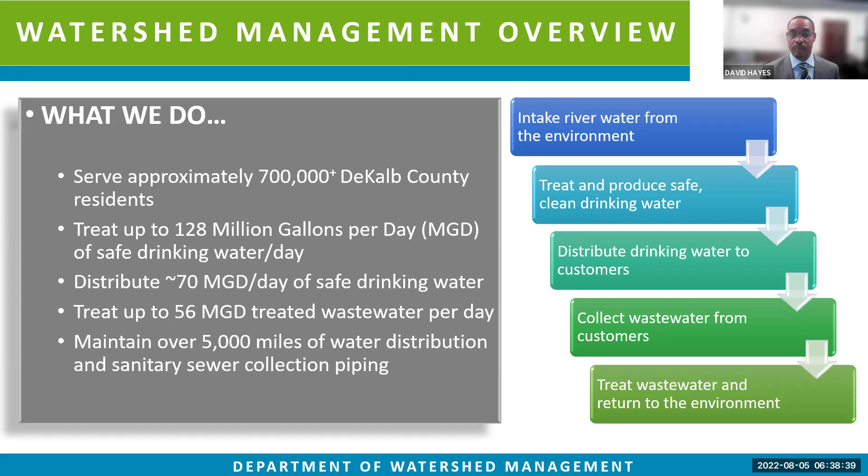So why are we replacing the lines in this area? Some of the water lines are more than 60 years of age and have far outlived their life. In your subdivision, it is unfortunate they used a PVC line that has a shorter lifespan. Your lines were installed somewhere around the 1984, 86 era. But these lines get brittle and they break. So what we're trying to do now is replace the water lines, to reduce the breaks, to improve service, which will yield a better DeKalb, a better future.

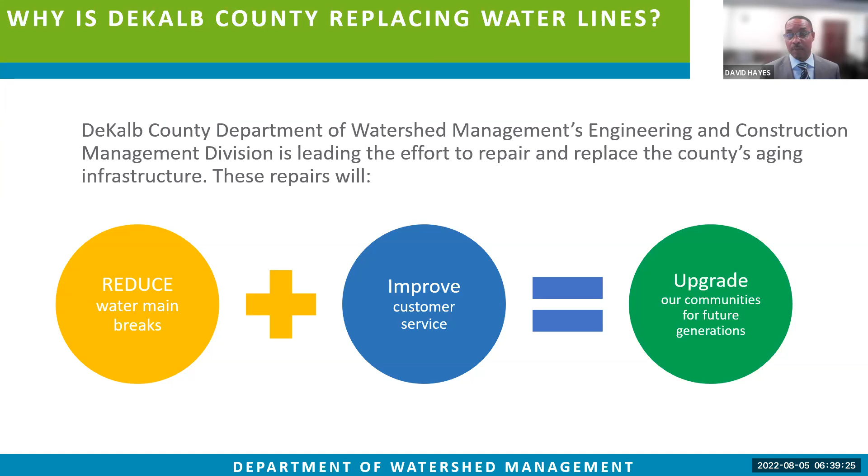To accomplish this, we've dedicated a full team to this project to include every needed resource from Watershed and all other water departments within DeKalb County, and several industry-leading engineering firms and construction firms, all led by DeKalb County's own Watershed Management Engineering Department. With this team, this will allow a timely, safe, and successful project.

Managing this initiative, and the next person that you will hear from, is the program administrator, Ms. Cassandra Marshall. Thank you, Director Hayes. Good evening. My name is Cassandra Marshall.

I am the Program Administrator for Capital Improvement Projects for Watershed Management. I am also responsible for managing the DWM construction management staff. In these next few slides, I will provide an overview of the system problems and our solution to repairing the aging water system.

In the North Shore subdivision area, the county has been faced with 44 water main breaks from 1989 to 2021. We've also encountered 19 complaints about brown water or low water pressure issues from 2017 to 2021. Although this pipe was installed in the 1980s, we've encountered constant breaks and failures, creating multiple operational inefficiencies.

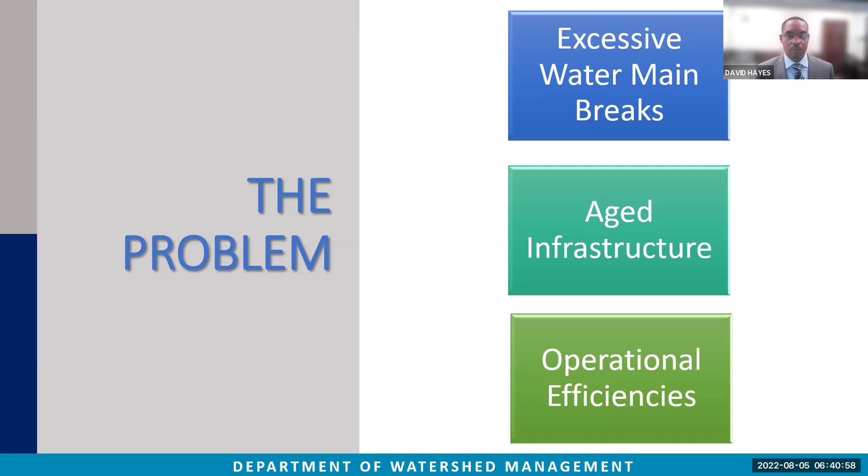The county has over 3,000 miles of pipe in the water system to maintain and provide drinking water to the ratepayers. We also have 4 pressure zones, 21 water storage facilities shown in cyan on the map, 16 pump stations shown in blue on the map, and 6 pressure regulating stations. As you can see, this is a large system to maintain.

Most of the system is aged and cannot be repaired all at one time. Therefore, the county had to develop a best practice way to evaluate and prioritize how and when the piping will be replaced. Our first objective was to model the system.

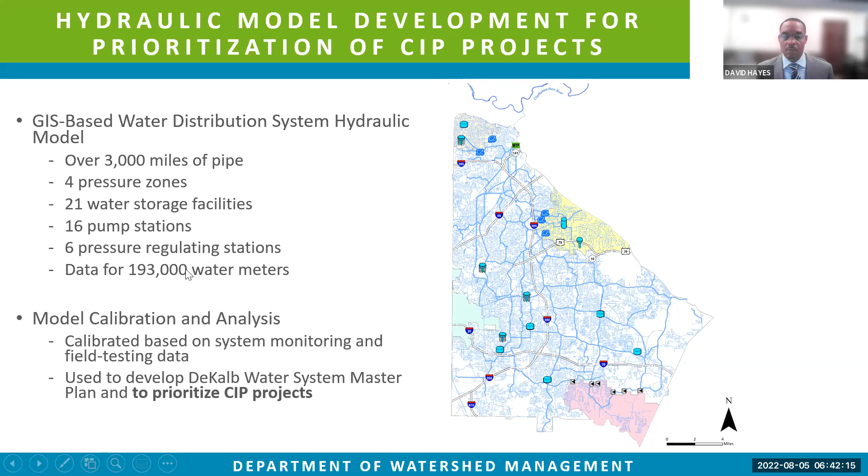In 2019, the county developed its first hydraulic model. A hydraulic model is a computer simulation of the water system. The model provided a big picture look at how the system should be functioning. To develop the model, we used county GIS data, meter data of the water usage from the billing system, and facilities data such as the water storage facilities and regulating stations. This data was ultimately used to develop the county's master plan and used to prioritize projects.

So to this point of the presentation, you've heard about the problem and the development of a replacement plan. I will now speak to the solution and the execution of the CIP project.

So what does CIP stand for? CIP, or Capital Improvement Project, is a project that helps maintain or improve an asset. It can either be new construction, an expansion, renovation, or replacement of an existing infrastructure.

Last year, the Board of Commissioners approved a new CIP program for $2.4 billion for projects to be completed from 2021 to 2030. The North Shore Water Main Replacement Project is a $4.4 million project included within that plan. My team, the CIP team, is responsible for getting that work done.

My team includes 4 DWM construction managers and 12 licensed inspectors. Later in the presentation, you will also hear from the DWM construction project manager for this project, Mr. Edgardo Amezquita, who has over 20 years of construction management experience and is a licensed water professional.

Along with in-house staff, we are also supported by consulting firms who help assist the county with construction management and inspection services. What we want you to know is we're here to help. We want to reduce or eliminate emergency repairs. We want to stop breaks. And finally, after the project is complete, it will improve sustainability to the system. These improvements should last a minimum of 70-plus years.

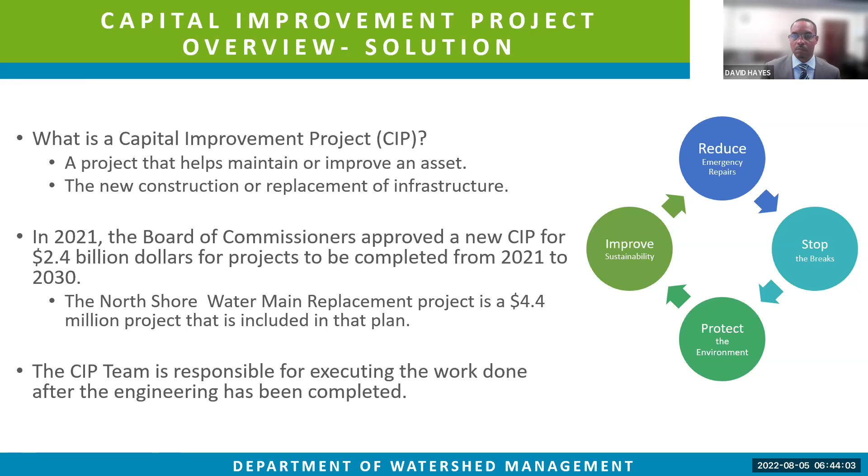Good evening, everyone. As Ms. Marshall said, my name is Edgardo Amezquita. I am assigned as the construction project manager for this project. My team consists of other construction managers and on-site inspectors. What my team does is we work closely with the contractor to make sure we progress through the project, finish it quickly and efficiently.

Now, the scope of work that we have planned includes mobilization of equipment. The equipment that you will see on site will be backhoes. You will see dump trucks coming through, and sometimes you'll see some metal plates on the roads. The materials that will be delivered through the project will consist of concrete, gravel, and asphalt paving towards the end of the project.

One of the things we have to do is establish traffic control. This is done with sign postings and personnel directing traffic.

We also install new water main and new water services. Now, the water services are installed in 2 phases: in the beginning, we install the actual copper line that connects to the new water line. The second phase is where we actually connect the service lines to your homes, and that happens towards the end of the project. So be aware that there will be notifications when it's your turn to connect to your home.

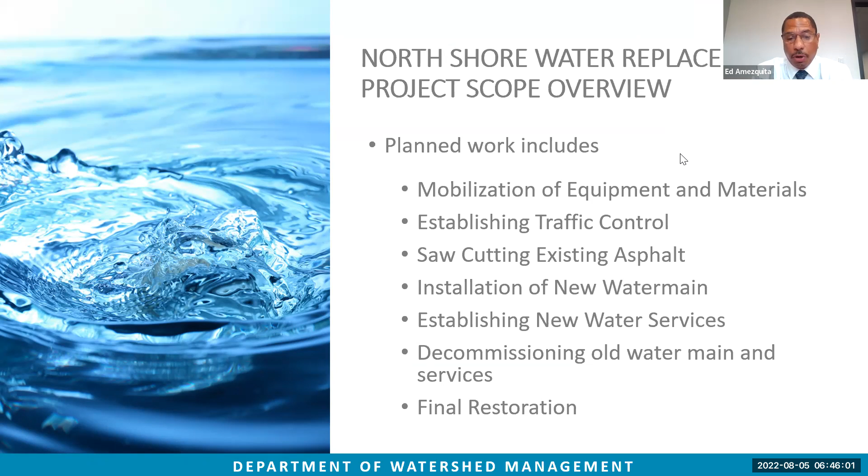Now, for this project, the roads affected are on North Shore. We have Woodstone Road, Woodstone Drive, Lone Oak Drive, Lone Oak Trace, and Lone Oak Way. These are the streets that will be affected.

There will be a second notification by way of posting when the actual construction is going to come and start on your street. So we have an overall notification process, but we also will post notifications on your street when the contractor is getting ready to work on your street.

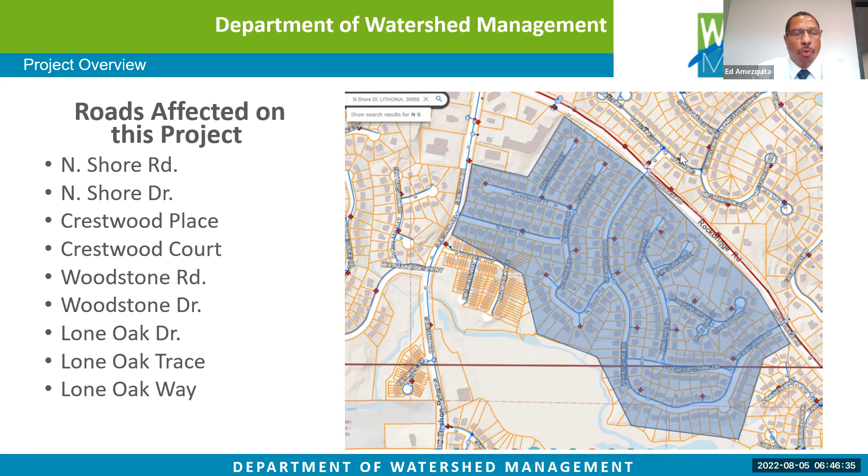Now, the method that we will be using on this project is the open cut method, which consists of cutting the asphalt, digging the trench, and installing the new water line. Then after that, we go into backfilling the trench and replacing the asphalt.

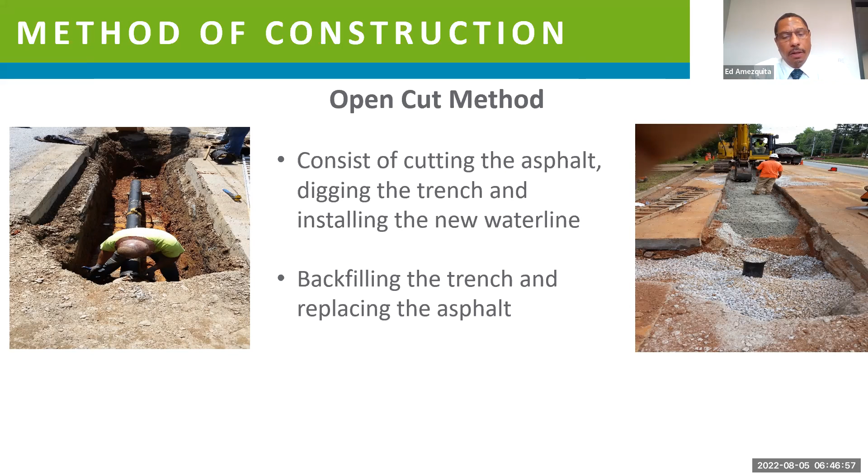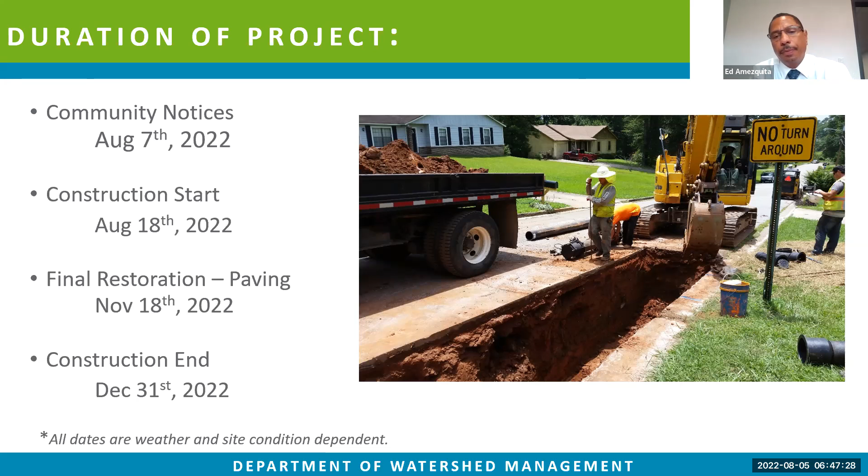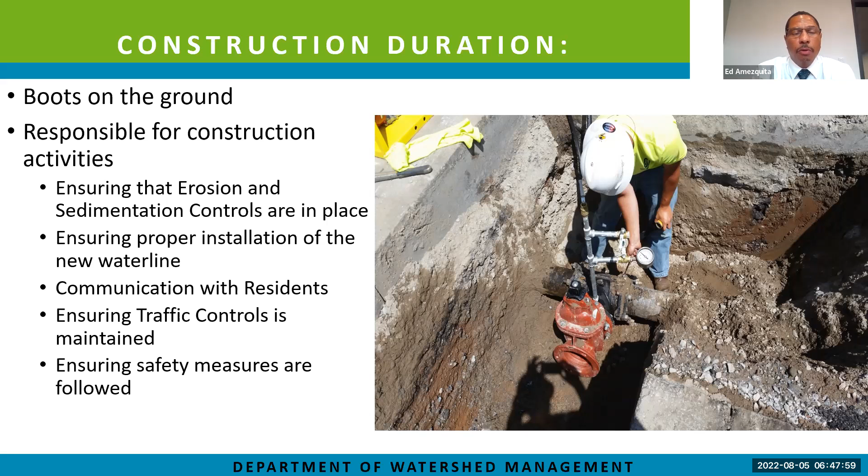Make sure that the residents are safe, make sure that the workers are safe, and anyone that comes in contact with our construction zone.

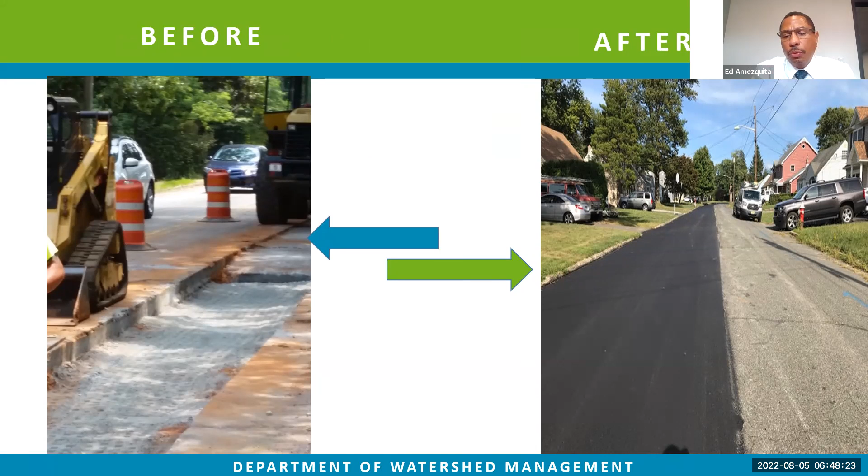At this time, I will now address community concerns and what the community should be aware of.

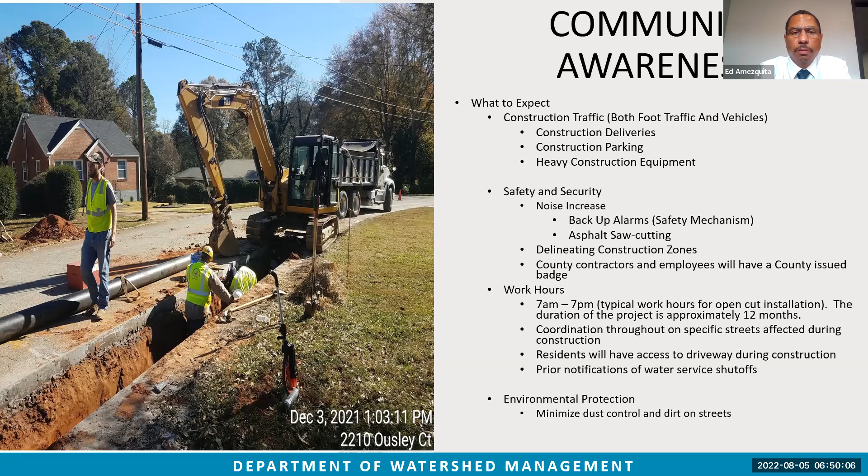You will now hear from Ms. Alicia Penny to discuss public communications.

Good evening, everyone. My name is Alicia Penny, and I'm the Public Relations Manager responsible for communications and outreach for the department. Tonight, I will share with you the methods DWM will utilize to communicate with you about this project. But before I do that, I want to briefly recap what has occurred so far within the community.